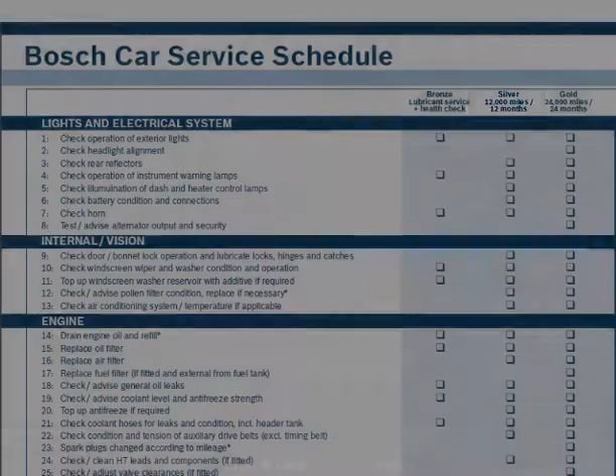When your Bosch-trained mechanic performs a silver service on your vehicle, 49 items are checked or serviced.

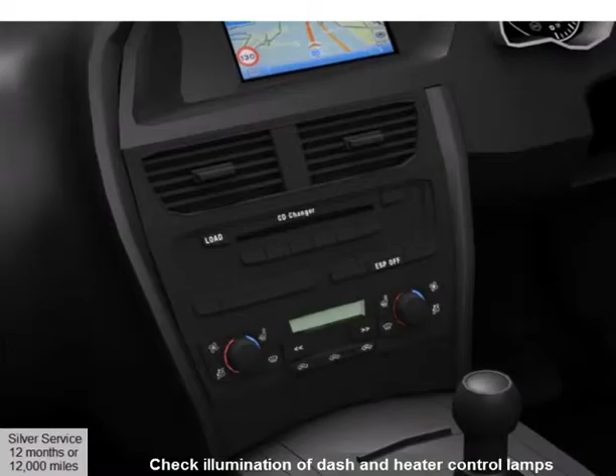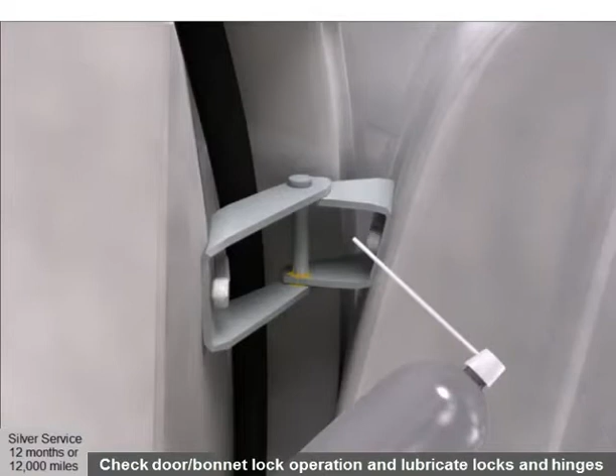Exterior lights, reflectors, warning lamps, dash and heater control lights are all checked for correct operation. The battery condition and connections are checked to ensure consistent starting. The door and bonnet latches are checked, and locks and hinges are lubricated. Windscreen wipers are checked to make sure the screen is kept streak-free and the screen wash is refilled.

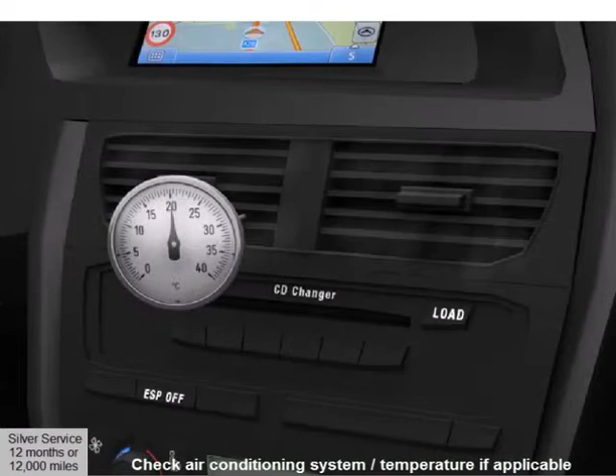Where the vehicle is fitted with a pollen filter, the filter is inspected to ensure clear airflow, and the aircon is checked for cooling efficiency.

The engine oil is drained and refilled with new oil according to manufacturer specifications. The oil filter is replaced, and the engine is visually inspected for oil leaks. The engine air filter is replaced.

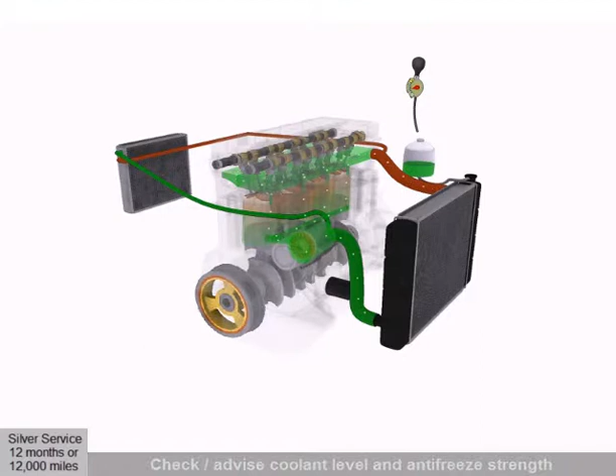The engine coolant level is checked, and the condition and strength of the antifreeze is measured. The coolant is topped off if required, and the cooling system is visually inspected for leaks.

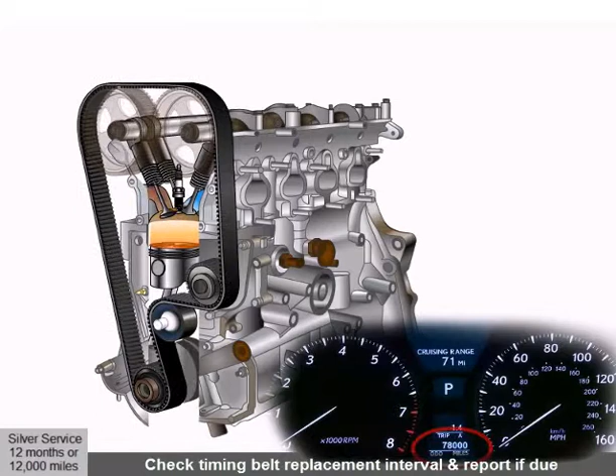The condition and tension of accessory drive belts, such as the alternator belt, is checked, and the fuel system, including the tank and fuel cap, are inspected. On engines with a timing belt, the manufacturer's replacement interval is checked, and replacement is recommended if required.

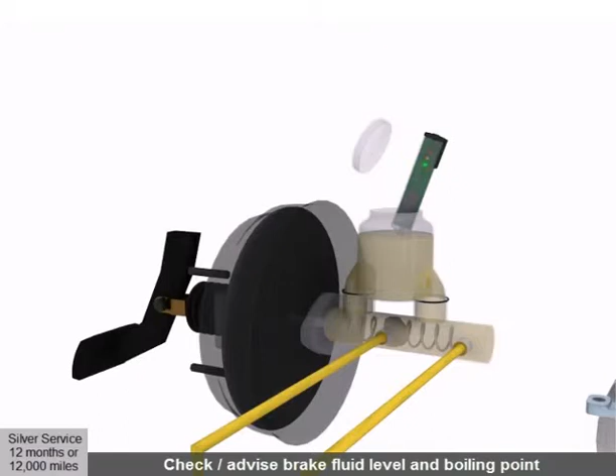Next, we move on to the brake system. The operation of the brake servo is checked, along with the condition and boiling point of the brake fluid. The fluid level is topped off if required.

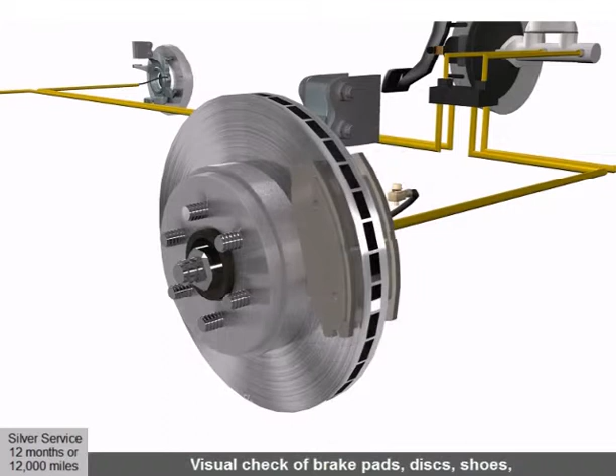Brake calipers, pads, discs, wheel cylinders, shoes and drums are inspected for wear or damage, and brake hoses and lines are checked for corrosion or wear.

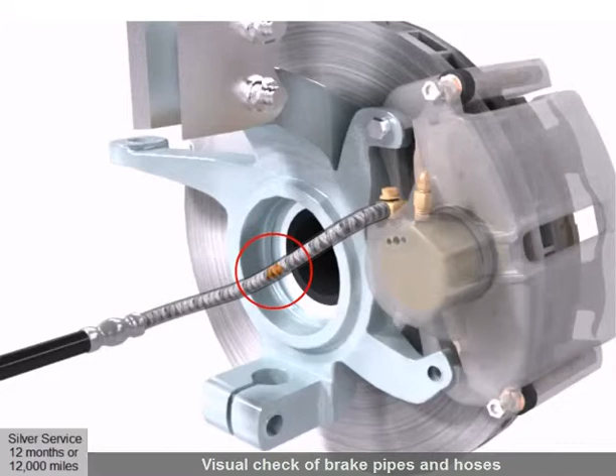The operation of the handbrake and linkages are checked and adjusted where necessary.

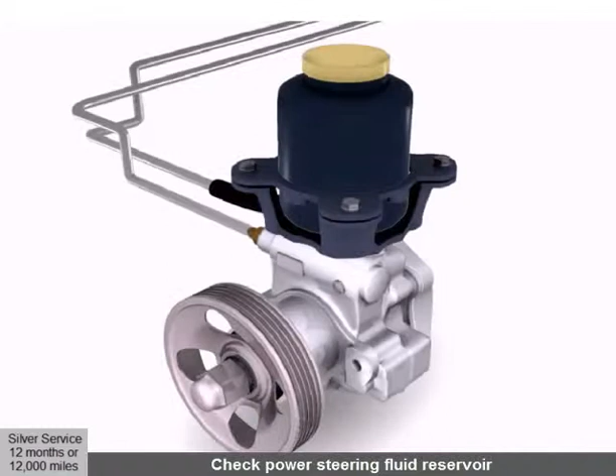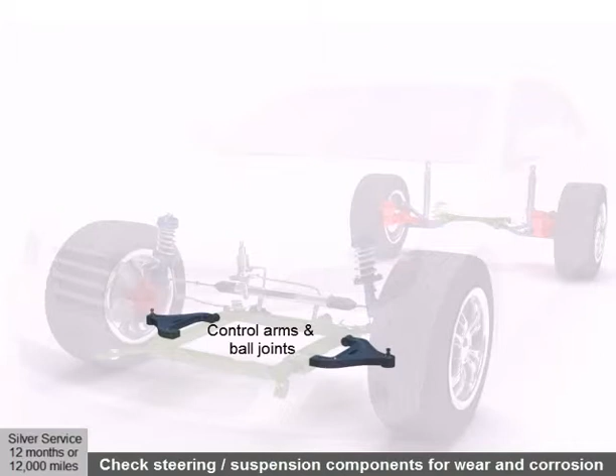Areas checked in the steering and suspension system include the road springs, the condition and level of the power steering fluid, and all major steering and suspension components, including suspension struts and shock absorbers, control arms and ball joints, the steering rack, track rods and linkages, anti-roll bars and anti-roll bar links.

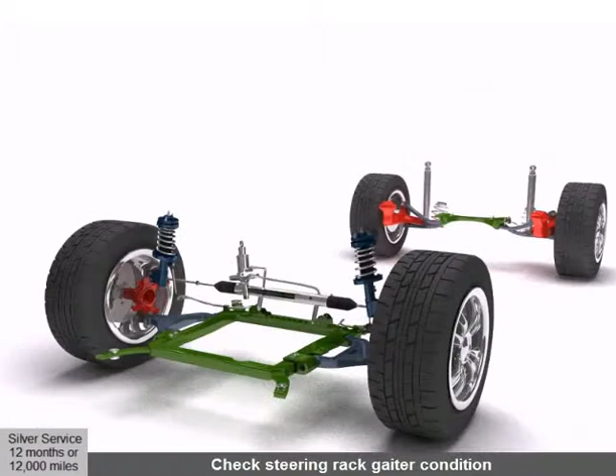The gaiters on the steering rack are inspected for tears or cracking, and the shock absorbers are inspected for leaks or damaged mountings. Wheel bearings are inspected for looseness or excessive free play and road noise.

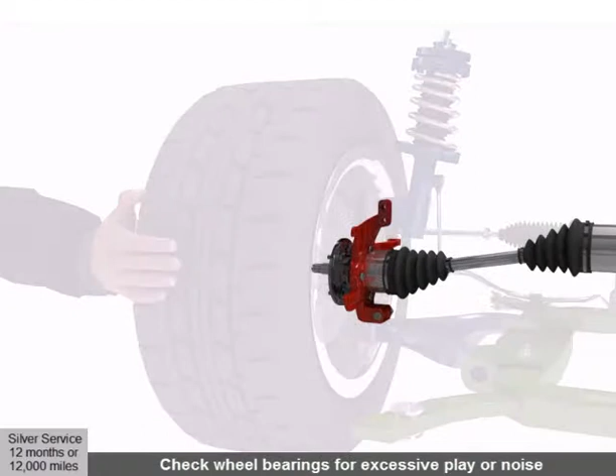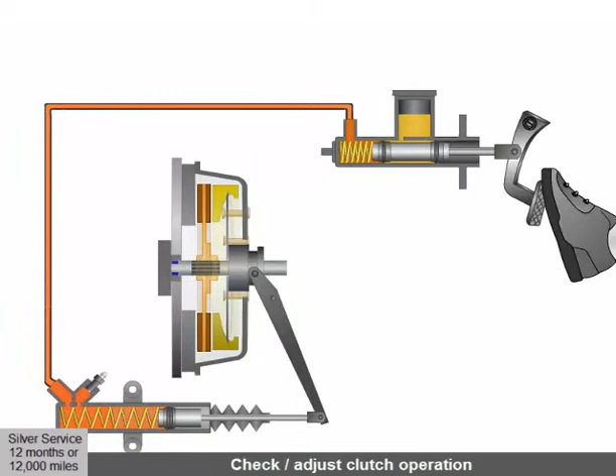The rubber gaiters on the driveshaft joints are checked for cracks or tears that could allow their lubricating grease to escape. The fluid level inside the gearbox and differentials is checked, along with the operation of the clutch on manual vehicles. The transmission or gearbox is also checked for fluid leaks.

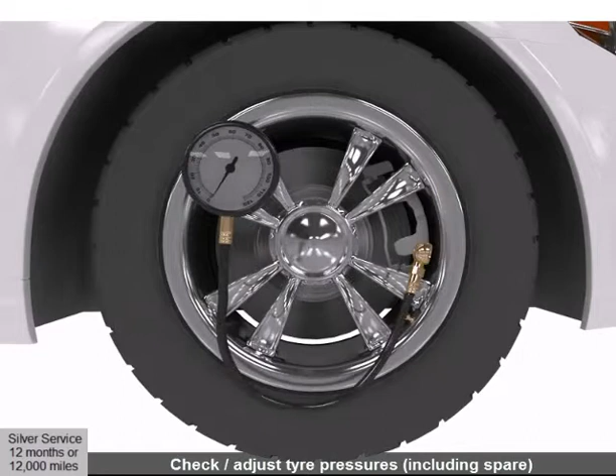The exhaust is checked for leaks and to ensure that mountings are secure. The condition and tread depth of all tires is measured, and tire pressures are checked and adjusted as required. Wheel nut torque is adjusted where necessary to match manufacturer's specification.

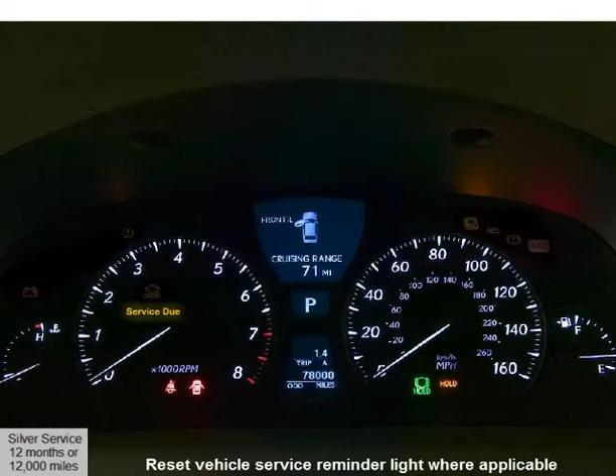A scan of the engine management system is performed, the service reminder light is reset where fitted, and the service book is stamped.